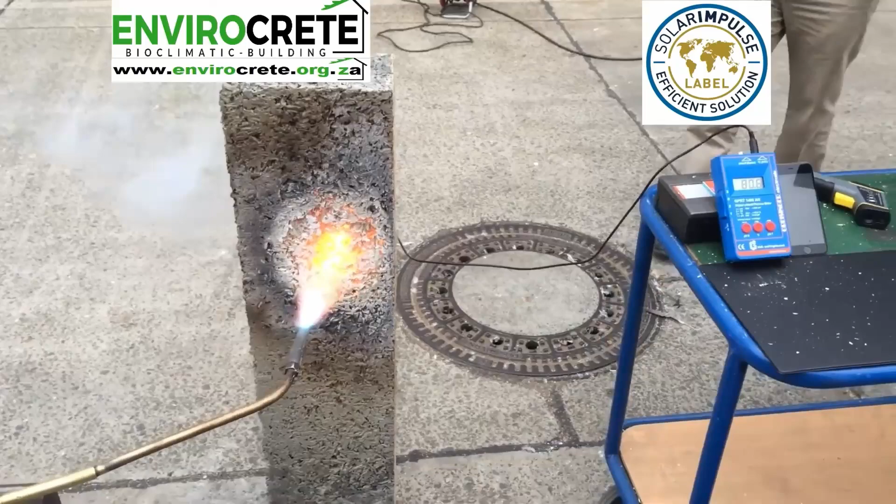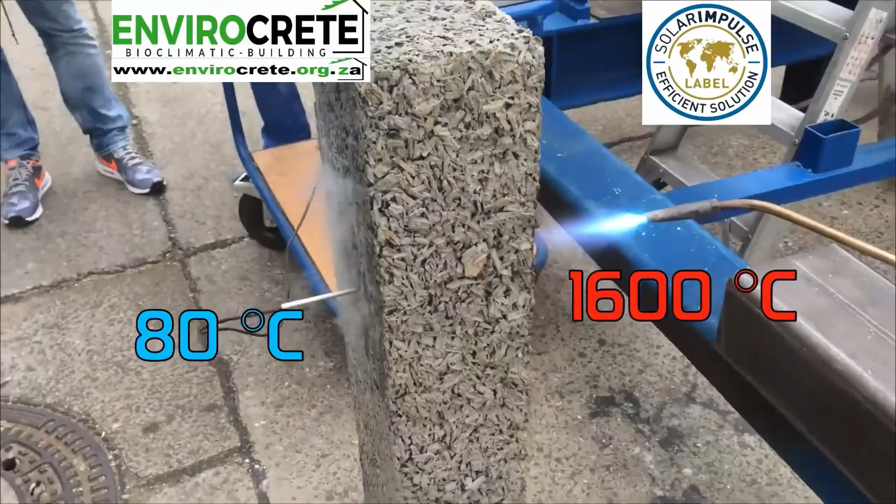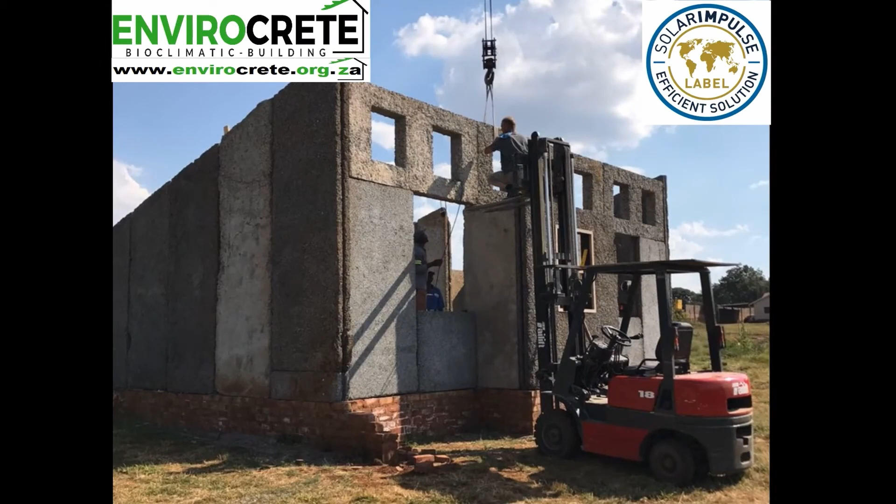So you can see the fire safety is great, and it's all assembled on site. I had the opportunity to actually see this house a couple of years ago already, and yeah, it's worthwhile. Please reach out to them if you want to know more about their product, want to know more about the company, and if you can go and have a view at the pilot house that they have built.

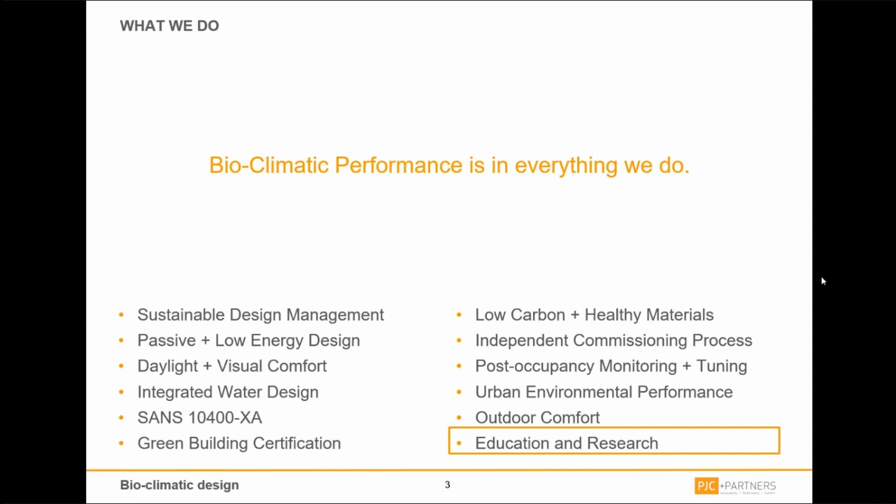And what do we typically do? This is very fitting because bioclimatic performance is essentially in everything we do. Our services cover various aspects, but we try to keep bioclimatic performance as the core around what we do across all our services. In this case it's under our research and education wing, for this presentation.

For today I'm going to try to make it a little bit different. Everyone could just Google bioclimatic design to get what it's about, so I'll try to keep it different. I'm trying to explain the bioclimatic concept itself, deconstruct the word, and go through the bio side of it and our human senses, go through the climate side of it, and we'll take a quick break, pause for a poll question, and then carry on with some practical design questions we've solved, and a little story I made up about Andy and Mindy. And then obviously at the end, some takeouts about the presentation.

So what's bioclimatic? As the word itself suggests, bioclimatic consists of bio, from biology, and climatic, for climate conditions. So essentially it's about the relationship of climate and us as human beings in the built environment. The word itself, bioclimatic, was coined in the early 20th century, and it was not really about buildings at that time. It was more about the study of plants and animals and the climate effects on plants and animals.

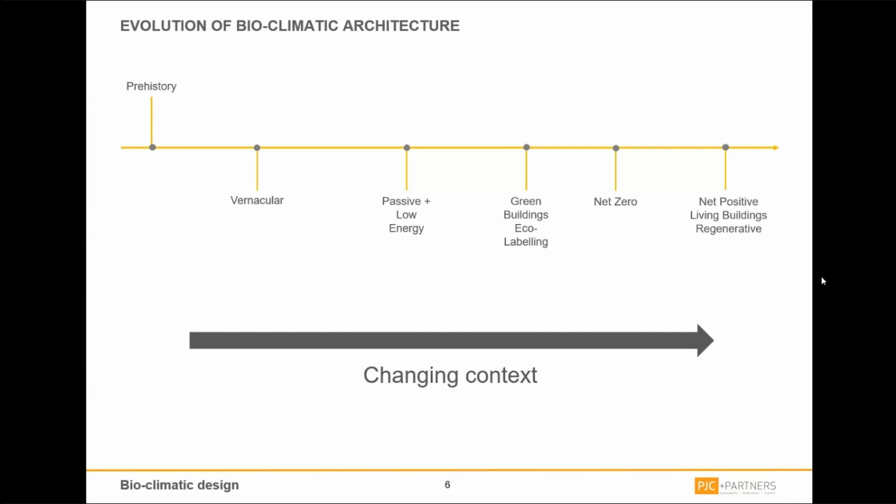So what is the changing context? If we think about prehistory, it was about human beings trying to live somewhere where they could be safe from the elements and safe from animals - it was for security and for comfort. Then architecture as a science and art starts getting introduced, technology was introduced and evolved, and the context changed again when ecology and other natural sciences and social sciences got involved, and it all fed into this bioclimatic concept. Now with social sciences and ecology and natural sciences all part of the concept, it's how we are transitioning to living buildings and regenerative buildings.

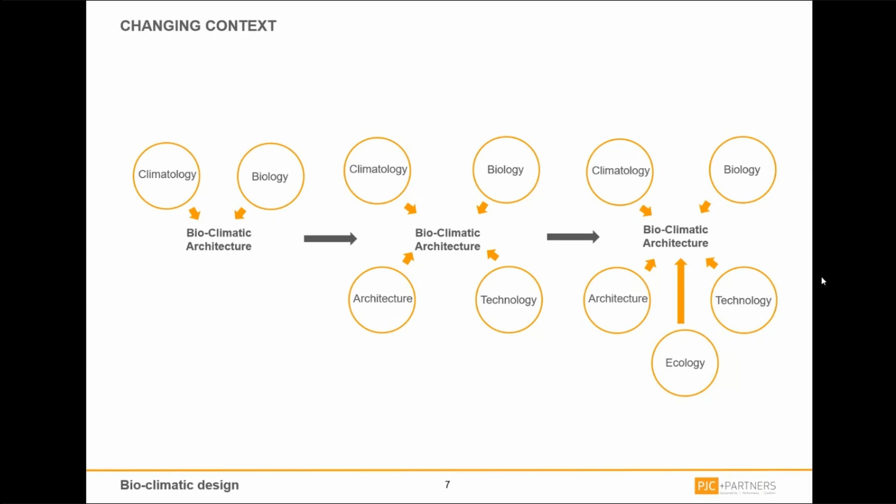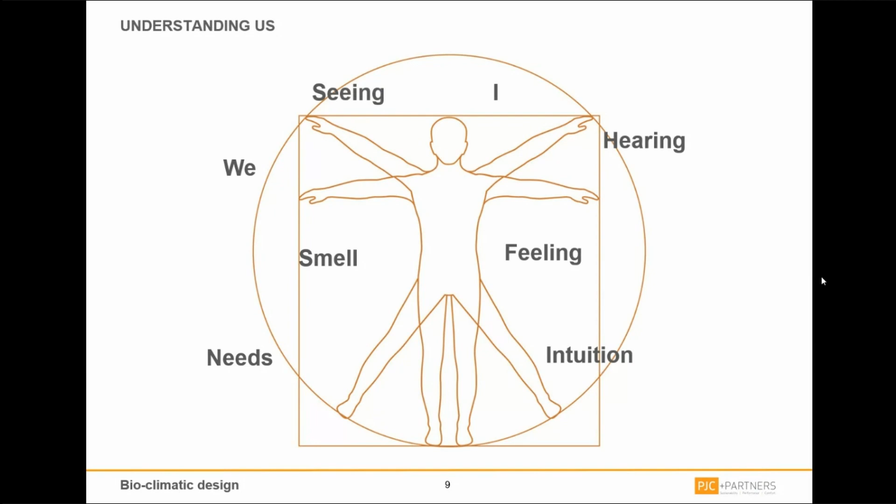So why biology? Why do we care? Why is it even part of this concept? Because in order to design anything where we live and work, we have to understand us and what it means to be a human being in a built environment. Buildings should serve us rather than the other way around - there's no point designing buildings which are super smart or super energy efficient if they don't work for us. Understanding us comes from our senses and a few other things, like the individual as 'I' or the 'we' as a group of people. I'm also going to talk about intuition, and I'll explain a little bit about these different senses and what I mean by intuition.

Every person is an individual and different from all other people on earth in terms of factors like age, sex, skin color, and external differences. But there are also differences in terms of cultural backgrounds, education, attitudes, and behavior. Beyond that, some of us may appear nervous or anxious, and some may appear more mentally and physically well. So it's important to understand this, because it's not one person who uses a building, it's multiple people who use any kind of building.

There's a saying, I'm not sure who it's from, but I really like it. It says the same fire that melts the butter also hardens the egg, which means the same stimuli applied to different people can produce different effects. And this is what a building is.

The individual, as I said, is not only different to other people, but they also develop and change over time. This is important for us, especially in the building context, because we are different persons at different times of the day. We feel differently in winter and summer, and one person can behave differently in different scenarios and situations. So it's important to understand how that interplays with buildings when you design for summer versus winter, for example, or morning versus afternoon.

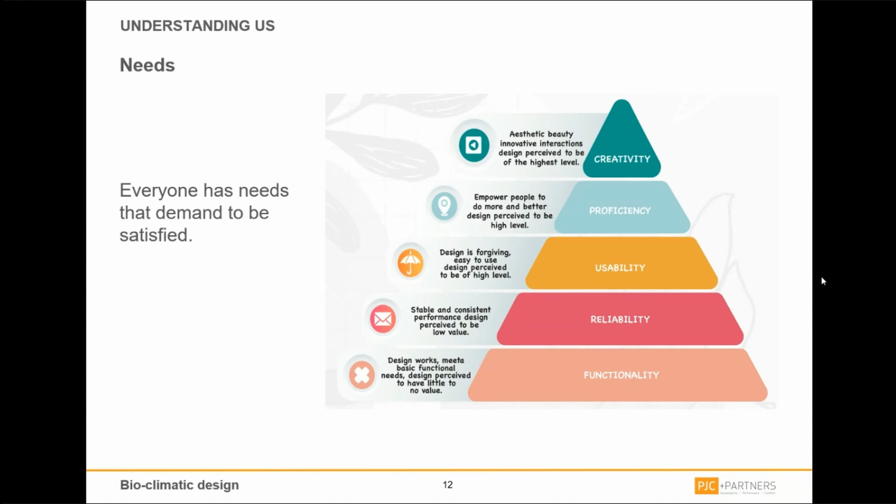Our needs - this is very simple. Buildings need to respond to our needs. As we've seen through the evolution of bioclimatic architecture, we've gone beyond just functionality, beyond just being a safe, secure place where we could be protected from the elements and wild animals. Now we're getting to the human senses itself.

Obviously everything we do around us is a factor of one or multiple of our senses. So seeing, visual comfort - and visual comfort is not just about lighting or daylighting, it's also how we interpret what we see. Not everyone has the same visual acumen. Multiple people can look at the same thing and interpret it in different ways, and the way lighting or color works also gets interpreted differently. Understanding that helps to design buildings with the best or optimum visual comfort for the majority of occupants using the building.

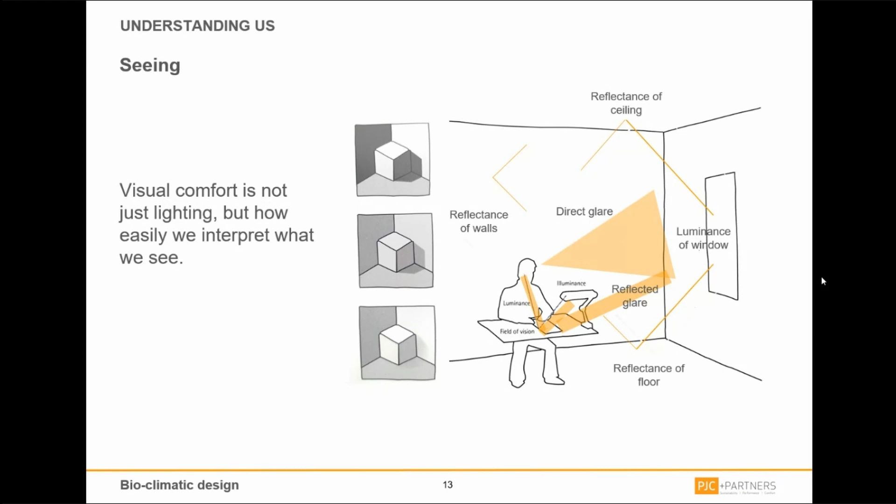A very quick example which everyone will know about is color - I'm sure everyone has seen how color affects our perception. When you paint ceilings, walls, or floors different colors, it gives a different perception of the space.

You can replicate that very easily yourself - you don't have to go find a room to paint. For example, in the office, on the left-hand side, you can use chalk and a piece of paper to easily mimic that perception. You can try it yourself and think about it before going into big simulations or going too far ahead in the design, to get an idea of what it would look like. We've done that in the office with fairly good success.

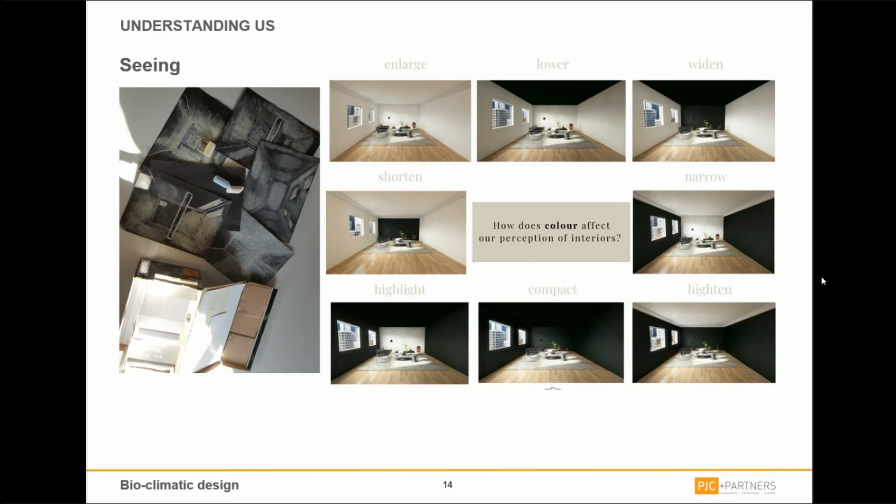On the left, you'll see at the bottom of the image there's also a little bird box with a cutout. Later in the presentation, I'll show you an example of what that means in terms of light and visual comfort. Hearing, which is acoustic comfort.

I'm not going to focus too much on it in this presentation - we're going to talk mostly about visual comfort and thermal comfort. But I wanted to touch on it because it is also one of our human senses. Similarly to how we see, we differ very strongly in our ability to hear. Some people, with a little practice, can distinguish individual tones from a mixture of frequencies, more than others, and this affects our acoustic comfort.

Why is it important? A very simple example would be double glazing or acoustic glass in buildings. This understanding helps to design buildings which are suited for a particular purpose.

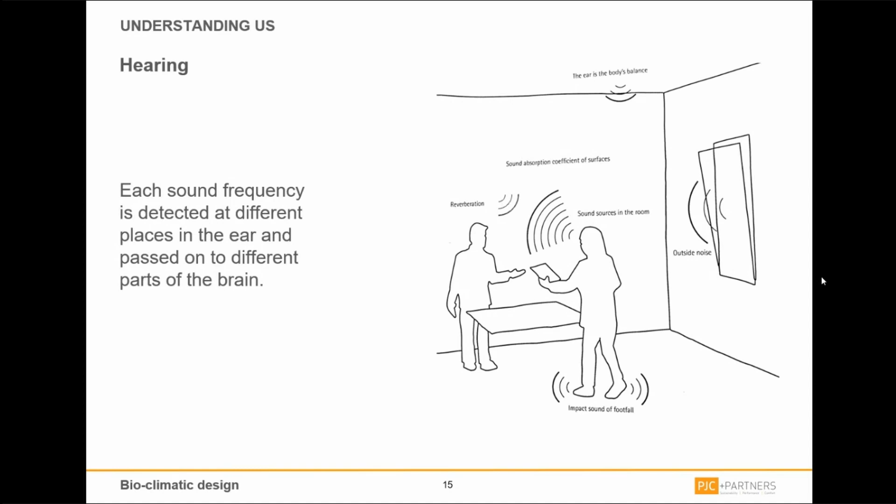Feeling - this is mostly about thermal comfort in this case, and it's mostly about the skin. The skin is the most versatile human sensory organ, with its receptors for cold and heat. We do not have a better measuring instrument - no mechanical or electrical measuring instrument matches our skin. It is so versatile and so accurate. Understanding how heat or cold react with our skin is very important - like, how do we lose heat?

How do we feel when it's too cold? How do we feel when it's too hot? What happens when we change a certain aspect of the environment around us with regards to thermal comfort?

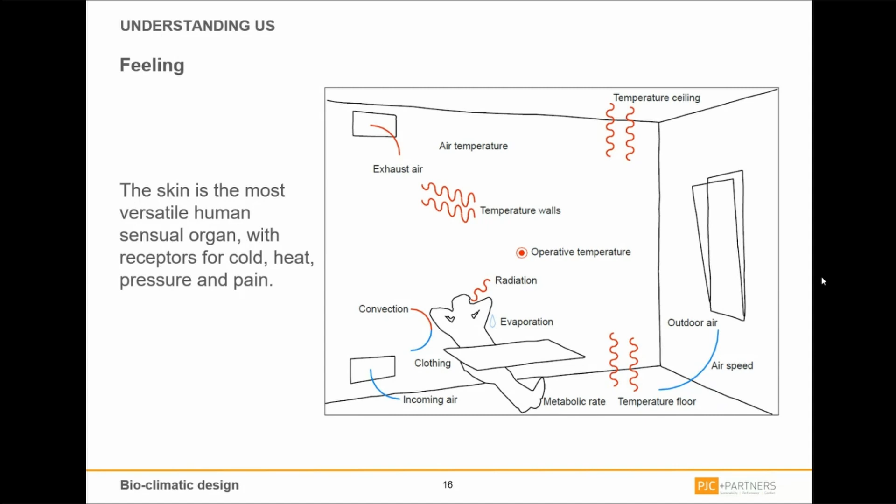And then in cold conditions, you'll notice the ears, fingers and feet start becoming very blue, and that's where it becomes a problem for your extremities, but your body still tries to protect you by keeping your core at a warmer temperature.

This is where when you sit next to a hot glass, you can feel the heat, and when you sit next to a cold glass, you can feel cold. It's because radiation is much more impactful to your thermal comfort.

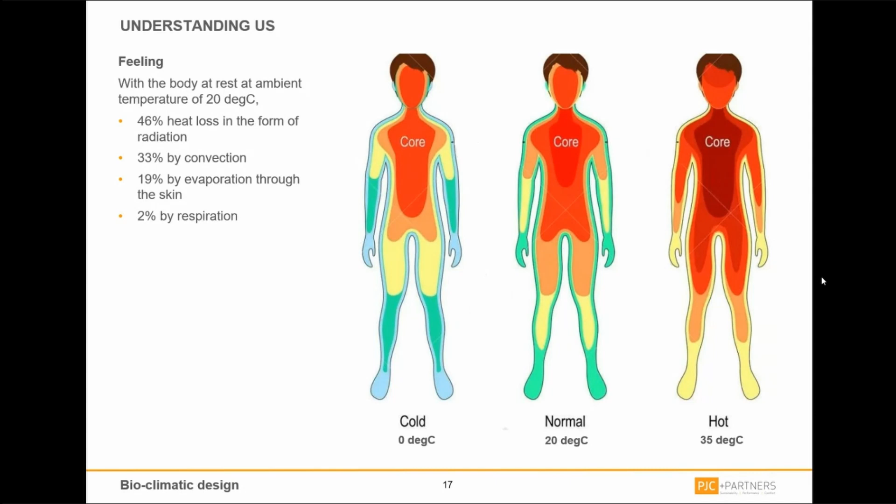Smell - I'm not really going to focus on it in this presentation, but again, as a human sense, it's important to note. And smell in this case goes beyond odors or pleasant smell; it also involves carbon dioxide production.

Fun fact: every liter of carbon dioxide given off requires 1 cubic meter of fresh air to maintain a very healthy environment. So if you're breathing out a liter of carbon dioxide, you'll need to make sure there's 1 cubic meter of fresh air coming into the space for you to be healthy and productive.

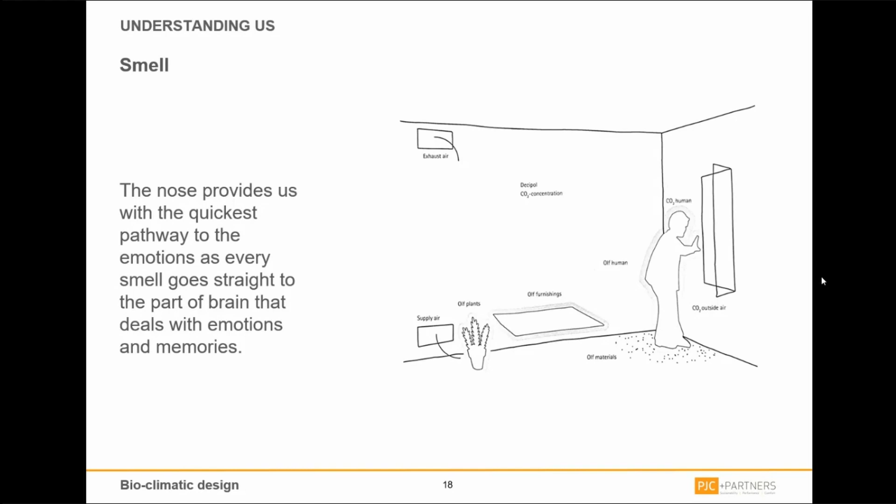And the nose is really an amazing organ. It's the quickest pathway to our emotions, and people would know that if you're walking somewhere and you pick up a smell, it kind of brings back memories and emotions always, and that's important to note when you are in a space.

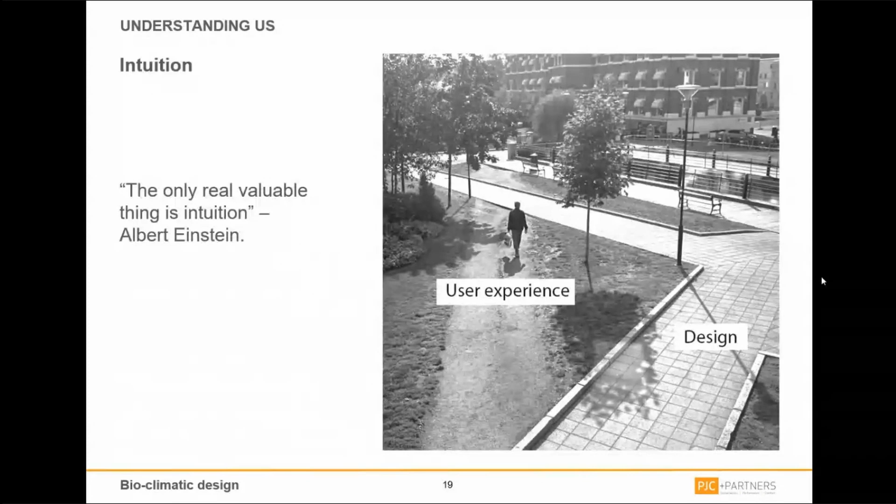But the user experience will be very different to how you've designed it, because you've ignored the intuition of people. And in the building industry as professionals, we try to quantify things as much as possible. It's the same as saying, let's design a building, put AC in, and there's the whole adage of 22 degrees air temperature and people should be comfortable. But thermal comfort is much more than that, and as we've seen, the human body is much more than a physical measuring instrument. It's important to understand intuition so that we approach problems from that perspective as well.

I've tried to touch a little bit on the biology side of it, but because it's bioclimatic, I'd like to touch a little bit on the climate side of it. To understand climate, I like to start by looking at the local context. What you're seeing on screen with the pie charts is actually data, actual climate data from Cape Town.

I took hourly data from a weather file in Cape Town - 8,760 hours - and asked, how many of those hours do we have daylight? South Africa, Cape Town, is usually 50-50. Then, out of those hours, how many are within a certain temperature band and relative humidity band, which we'll consider the comfort band - it's about 31% or so.

And then if we overlap that, you get what I think Chilu from Solid Green calls the natural hours. I really like that term.

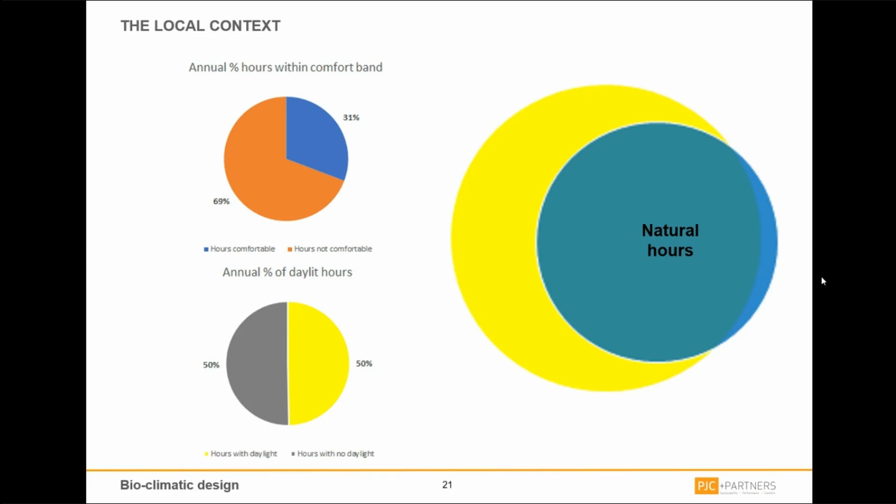Natural hours are very important for us to consider, which means we should not be reducing those natural hours in any building. Otherwise, we're not doing our job properly. The idea is to increase those natural hours without having too much of an energy penalty, if any at all. And the whole thing is around the biology and the climate, so it's about not competing against the natural forces, which is our climate, and our biological rhythms, which is our biology. That's the whole essence of bioclimatic architecture in a way.

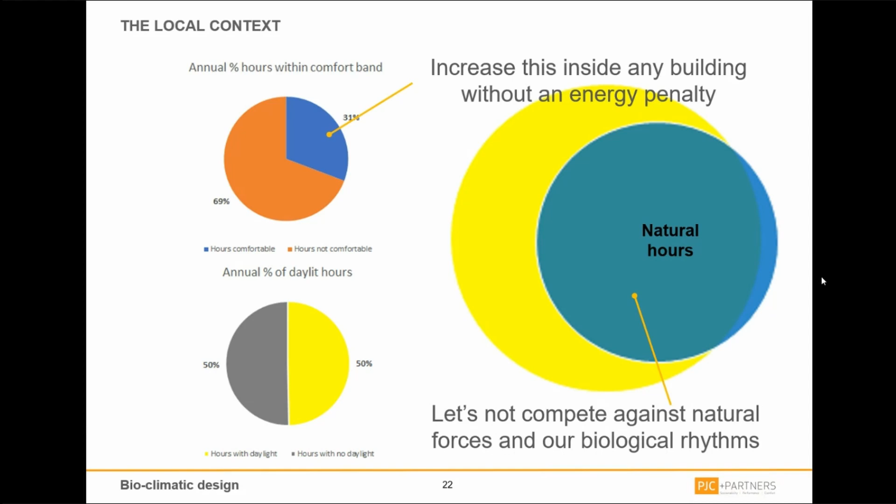So what can climate tell us upfront? Climate in general has a lot of data attached to it. We always look at the climate, but climate is full of data. It's got temperature data, relative humidity data, radiation, wind, all kinds of data. So it can tell us a lot of information upfront.

It can tell us whether in this context we can have natural ventilation, so we should design our buildings more towards that. It can tell us, do we need to have a mix of active and passive systems? It can tell us, can we use the day and night temperature differences to implement certain technologies, or use that even on the thermal mass of the building? So there's a lot of things we can extract from just the climate data itself, without even having a building shape at the beginning.

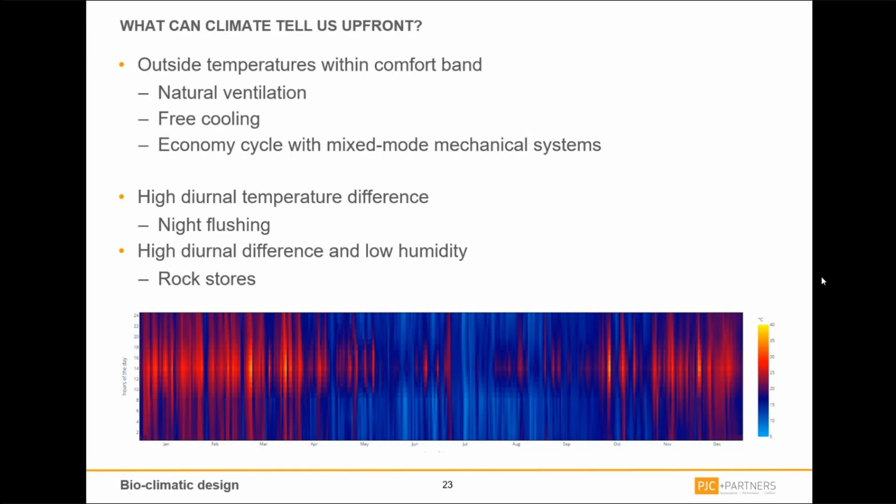We can't talk about the climate without understanding the sun. The sun is one of the biggest factors influencing any climate. Apart from having beautiful photographic pictures, it contains an extreme amount of data we can harness from the sun. It produces energy, it produces light, it produces heat, and it gives life to everything around us.

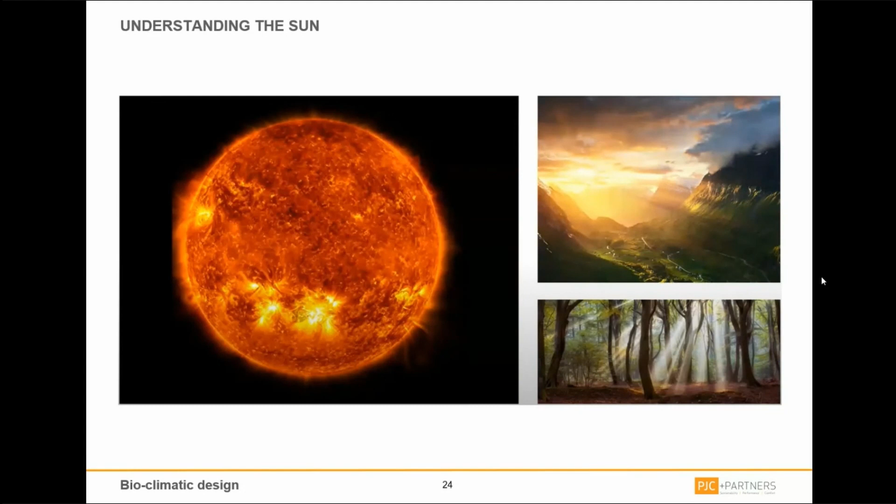So what is it we can extract from the sun? This is a very simple example, again, for Cape Town. The top measures, the roses we call the solar radiation roses, show solar radiation in Cape Town for summer, from November to April, separated into diffuse and direct.

The difference between diffuse and direct is: direct radiation is the sun rays you can feel directly, with one path from the sun directly to the ground. Diffuse is all the reflected kind of radiation from the ground or through the clouds - any rays that are not direct from the sun. What's important to note here is diffuse radiation on all orientations is more or less the same, whereas direct radiation is mostly concentrated on the north, east, and west, but not on the south.

Most architects, any building professional, knows that in the south we don't put any shading in Cape Town. And it's true, but it's also more than that, because yes, shading will affect your direct radiation, but your diffuse radiation is then not - it's not about shading, it's about the glazing. And that's a lesson out of it. From simply studying the sun, we can immediately get lessons for glazing and shading.

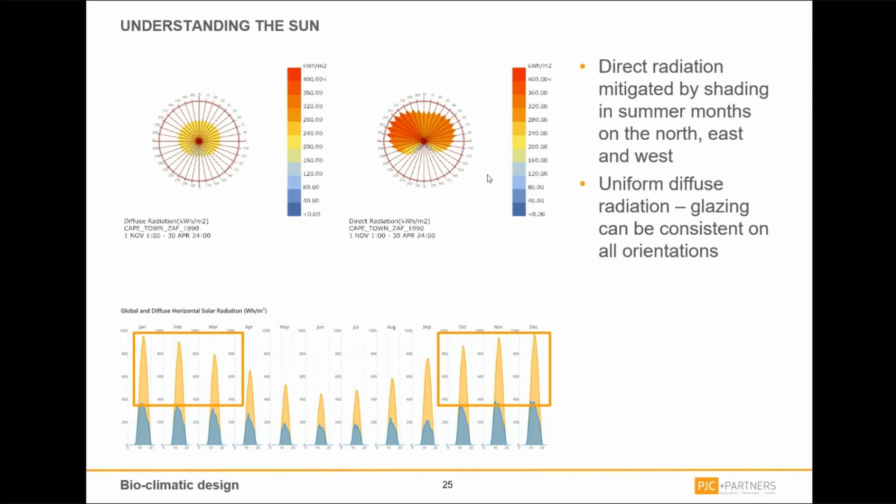When we talk about shading - this is a very simple example of understanding the sun and our latitude, where we are. I'm not going to spend too much time on it, but I just want to show that in Cape Town, on a north facade, you've got your sun at a certain angle in summer and in winter, and based on simple trigonometry and maths, you can easily get an average of how deep your shading should be. That's a very basic example.

But with the same maths, you can get a different type of shading with the same shading effect. That's really understanding the basics, the first principles of the sun and how it looks, with different angles across different latitudes in the world. It helps inform bioclimatic design before we even go and design buildings with a shape.

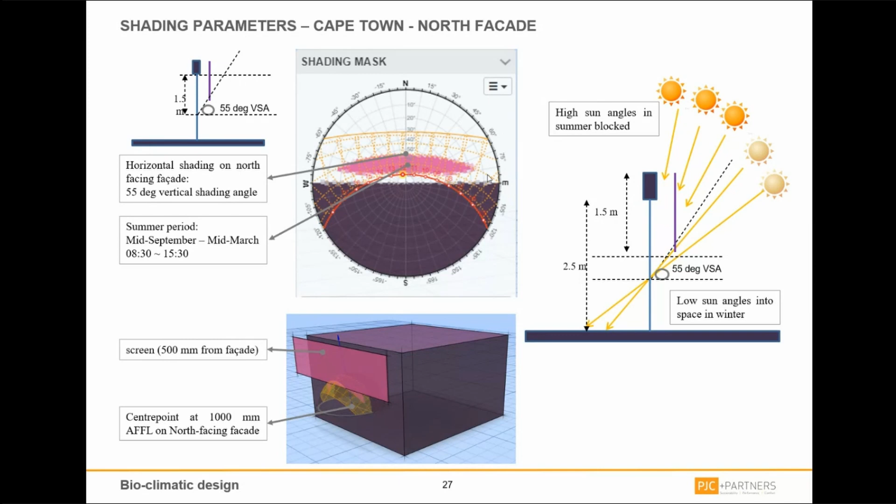More on the sun: apart from shading, the sun provides us light, and daylight is a great proxy, because light is a very curious thing. You can't feel it, you can't smell it, you can't hear it, but you can see what it does. And it's a very good proxy - one doesn't have to have all the nicest, latest software; by looking at what light is doing, you have some sort of idea how to think about your shading and your glazing. It's a very good exercise for everyone thinking about bioclimatic design.

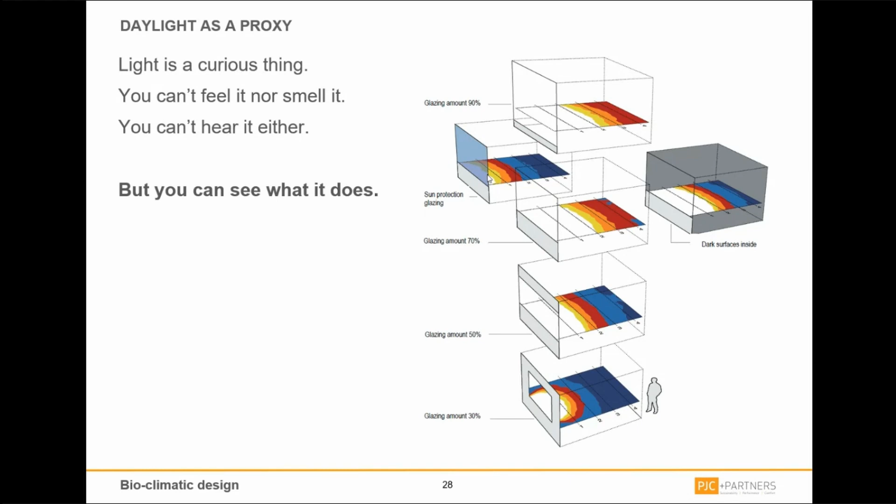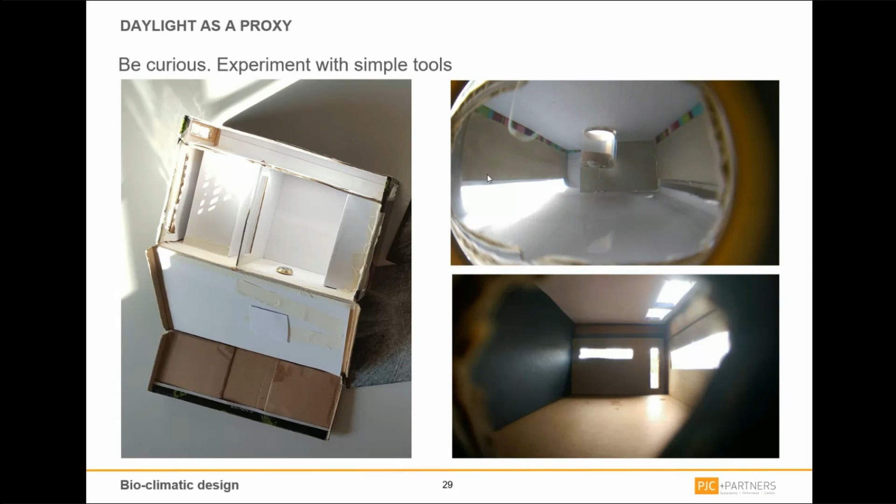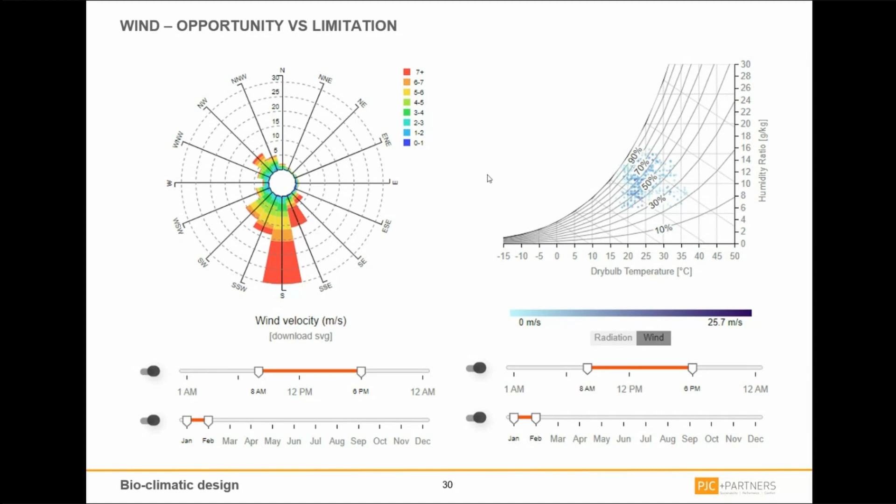The main thing is you understand how to use wind as an opportunity and where wind could be a limitation. For example, in Cape Town in summer, we would love to use natural ventilation all the time, but we know we've got the Cape Doctor, the southeaster, which blows in and will completely destroy your window if you leave it open. That's the idea - have enough information to know when it's an opportunity and when it's a limitation, and also when to turn the limitation into an opportunity. It's a way of thinking about the first principles of it.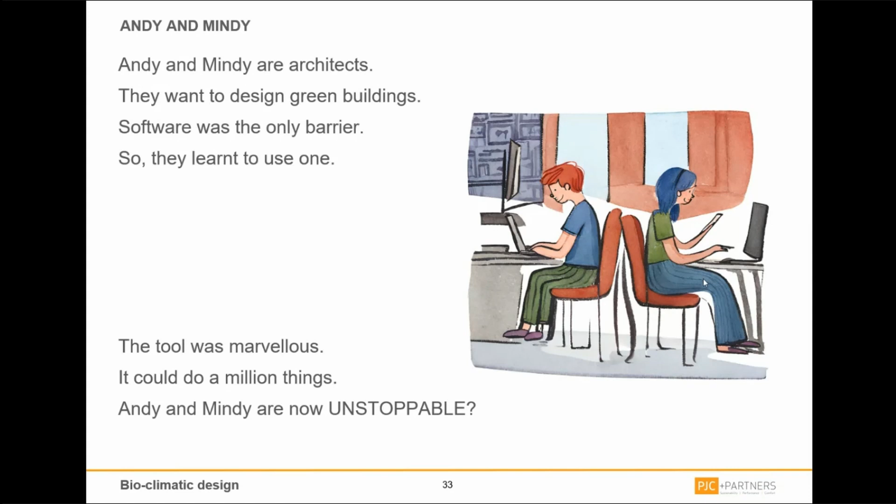But are they unstoppable? If we look at Andy - Andy says to the software, here's my building, run the green options. The software gives them, here's our 50 options. Andy says, wow, which one do I choose? The software says, here's 10 more options to narrow it down. He says, well that's great, I'm still confused. The software is like, here's the single best option. Then they say, are you sure? The software was like, well, you're the one who pressed calculate, you should know. And then the conclusion was, well, it's too technical, too time consuming, so I'm better off without the tool - at least I'm designing based on my expertise.

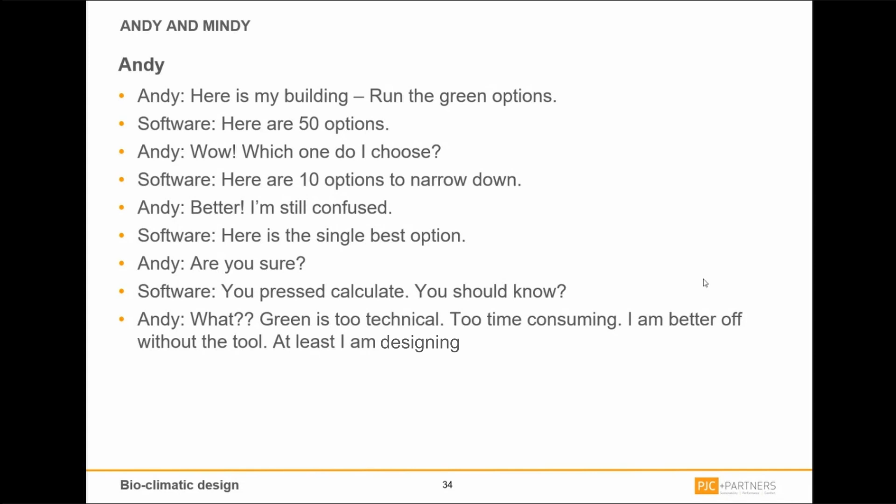But if we look at Mindy - here's my building. But instead of saying run the green options, Mindy says, well, check if roof insulation is effective - so give me the temperature output for the room for one summer week.

And the software gives what Mindy asks. Mindy notices something and says, well, why is the living room cooler than the bedroom? The details are the same. And the software says, oh, there's a modeling error. We didn't put insulation in that room, so we'll run again. Then from those results, Mindy says, well, it's clear insulation is better.

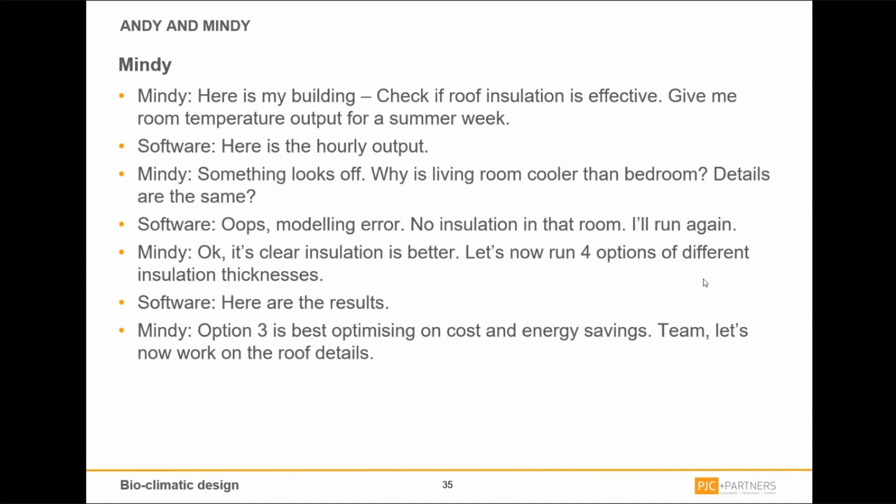So let's just now run 4 options of different thicknesses. Out of that, Mindy finds that option 3 is the best in terms of optimizing costs and energy savings. So she goes back to the team to work on the roof details based on the insulation thickness. And what happened out of that is both of them used the same software and concluded differently.

So the moral is questions matter as much as tools. Software is important, but knowing how to use the software, asking the right question, and knowing how to approach things also matters, sometimes more than just the software and the tools. That's the essence of what I'm trying to get to in bioclimatic architecture: understanding first principles, understanding what it means for the people and the building in that context.

Mindy's advice to Andy would be, well, let's define the question and the metric so that we know what we are evaluating. Let's anticipate the outcome based on first principles, building science principles. And then let's use the software for guidance and answers and to refine our solution.

And that's in a nutshell what we're trying to do. We're trying to understand the first principles of bioclimatic architecture and apply it to solve our problems and design questions, and hopefully along the way get buildings which are energy efficient and work for us.

So I'll give a few examples which we've done in the office. I haven't put too many examples here, just I think 3 or so examples around different contexts. And the first one is a daylighting problem.

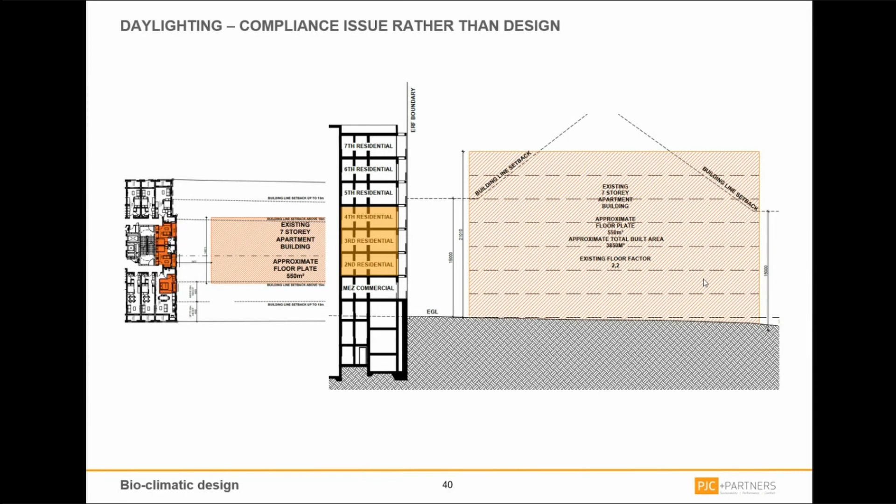In South Africa, we don't actually have a statutory regulation on daylight, but it still got raised as an issue. So we got approached and looked internationally at what metrics we could use, what performance indicators. Typically you've got 3 different types of metrics which you use.

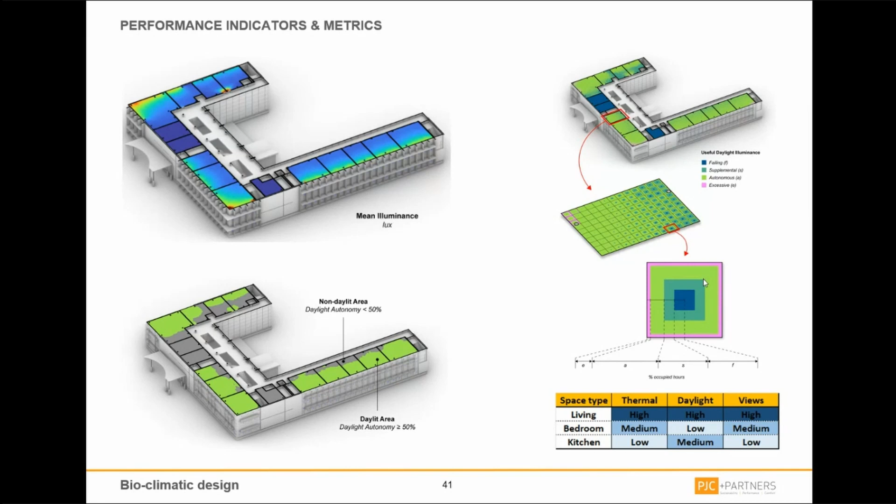But then it's not enough to know the metrics. It's about knowing what the indicators are, what the hierarchy of comfort is with regards to the different spaces, what benchmarks to use. And it's important to know that.

In this case, the mean lux of the design is about 495. With our recommendation it became 928. And it's using a little bit of what we understand about light and how light behaves to provide those recommendations.

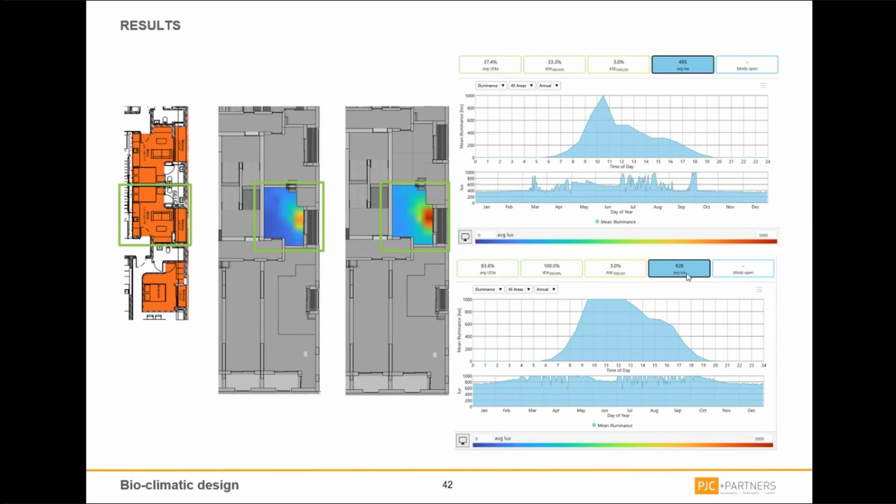And the same thing around other different metrics. So this is spatial daylight autonomy. And this metric—just in case a lot of people don't know—daylight is not just about how much lux levels or how much light we've got. It's also about distribution. Distribution of light is also very important so that we don't have glare, we don't have contrast, and there's enough light across the floor plate so that we are safe.

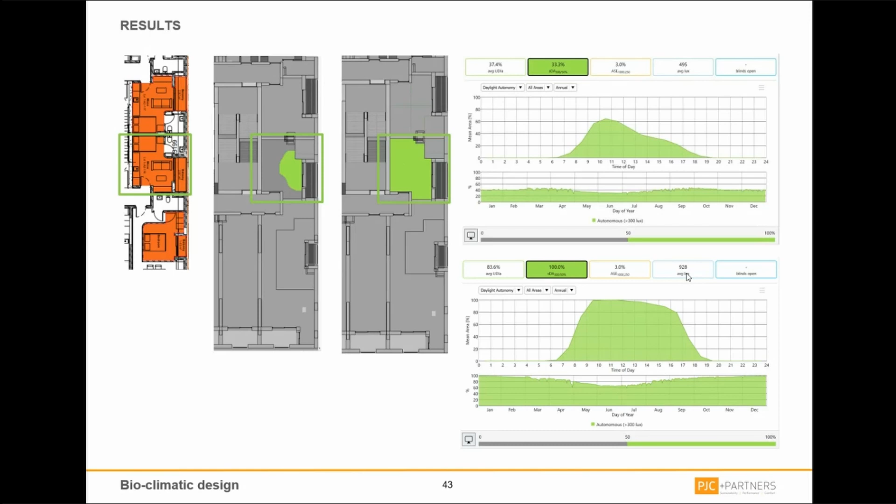There's no dark spots, and obviously the context is important. Some contexts like museums and specialized contexts, you do want darker areas in some spots, and understanding how light behaves helps us design for all these kinds of spaces. That's just a different metric.

But at the end, essentially, the idea is to show one where you're not meeting compliance in a certain way, but through recommendations you can meet compliance. And that's a very simple example of using daylight, but understanding how daylight works, understanding the different metrics of daylight and how to apply it, how people see it and interpret it.

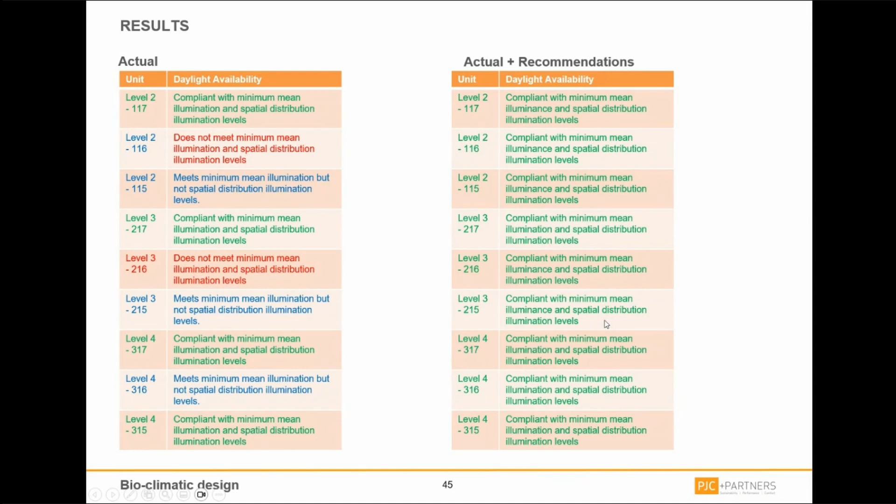It's very important because our metrics wasn't just about lux levels, it was also about spatial distribution. The other one is glazing.

This is a very typical question we address in a lot of projects: what glazing should we use on our buildings? Enough people have done it enough to know from gut feel, in this climate use this or that. But in this case, there was more than just interpretation of glazing. Acoustic was also a primary factor, along with different orientations, what we use for it, and cost. Cost was a big factor too. Understanding how this relates to cost matters, because it's not about getting the best glazing everywhere around the building—it's about knowing where we need it and where we don't.

It's important to understand, if you look at the top left side of the slide, this image about how light from the sun goes through glass. The sun shoots out short wave and long wave radiation towards a building, but glass converts every short wave radiation—short wave radiation being visible light and UV—into long wave, which is infrared, which is heat, and traps it inside. Once the light goes through, it gets converted to long wave, and it cannot go back out through the window. This is essentially the greenhouse effect, and this is why when you have glass-enclosed spaces, it gains heat when exposed to sunlight.

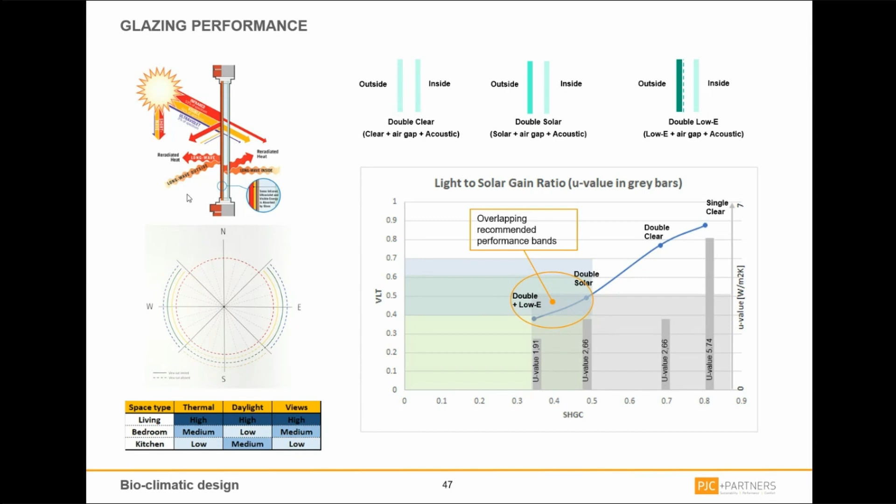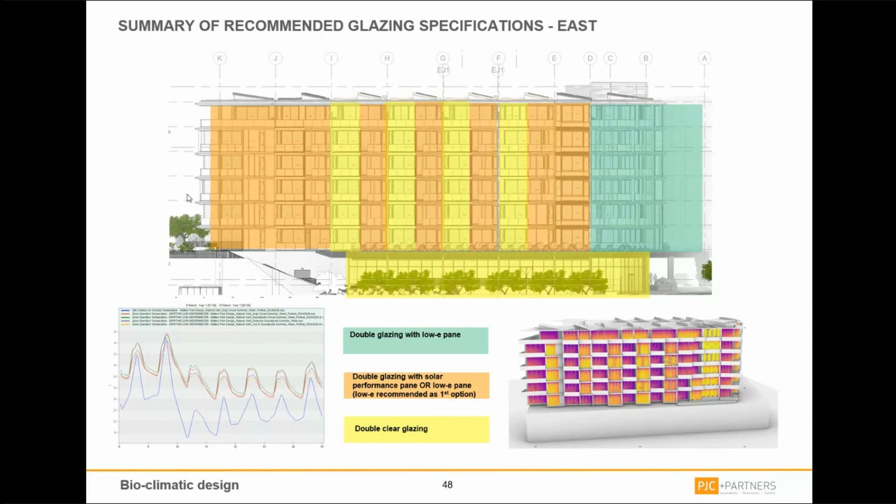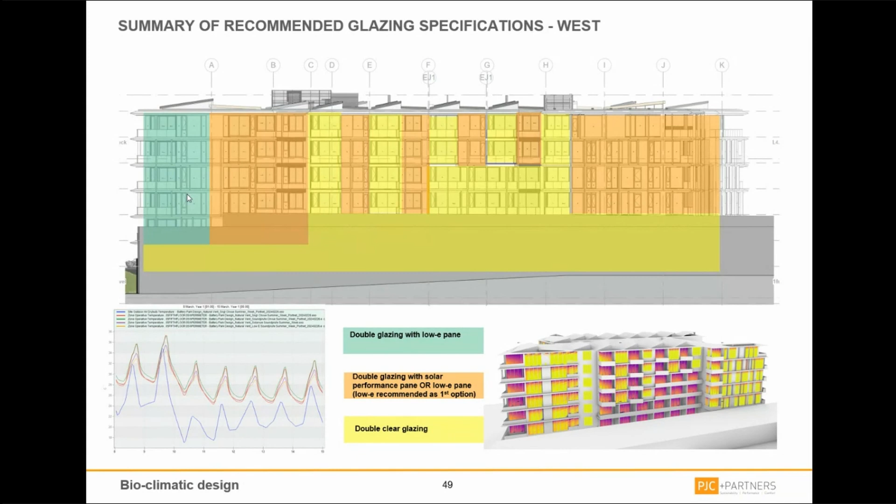The difference of knowing all of this is very important when you do various kinds of simulations about temperatures and radiation. It helps you identify that you don't have to have one solution everywhere. As long as you can balance your costs, your aesthetic, and your acoustic requirements, you're able to play with the building and think about it differently—say, if I do a certain shading response here, I can put a different type of glazing, and might not need it in other places. It all fits within the budget while keeping the same architectural philosophy, understanding the first principles of sunlight and radiation.

This one was a glare question. The building was already built, and the tenants had moved in—a single tenant kind of building. They have a reception desk, as we've seen in most commercial buildings, in the atrium, and they had a glare problem there. It was unworkable—everyone sitting at the reception area had glare in their eyes and on their screens. The easiest option would be to put automated blinds all along the atrium facade, and it had to be automated because of the span and extent of it—you can't do it manually.

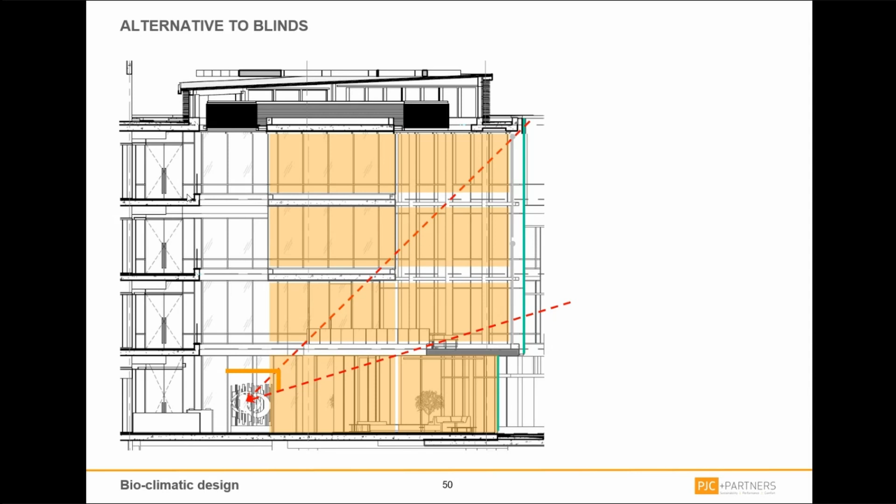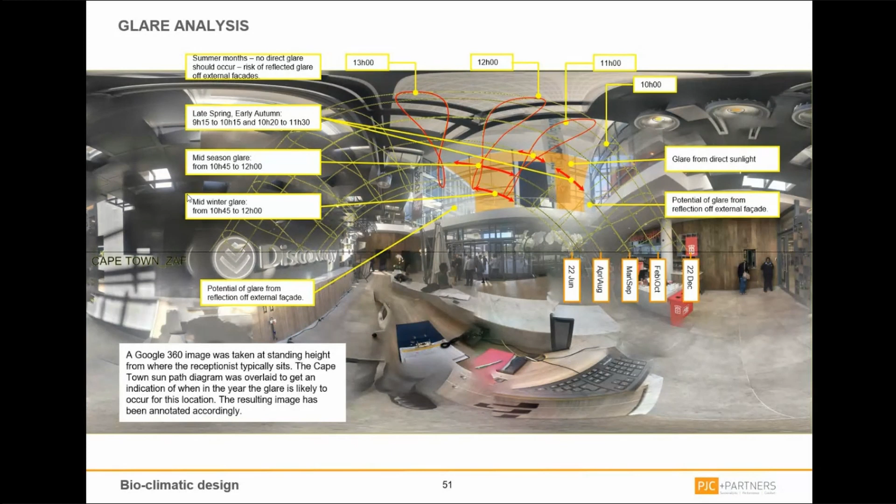That inherently carries a lot of cost to do after the building is already built. So what we did is go there and use some basic tools and first principles ideas about where the sun path is, to find out when the glare happens, at what time, and what alternate solutions could be approached. What we proposed was to build an architectural interior design feature around the reception desk, which blocks the sunlight when it's a problem, combined with having blinds only where needed, where the feature around the desk doesn't do the work required.

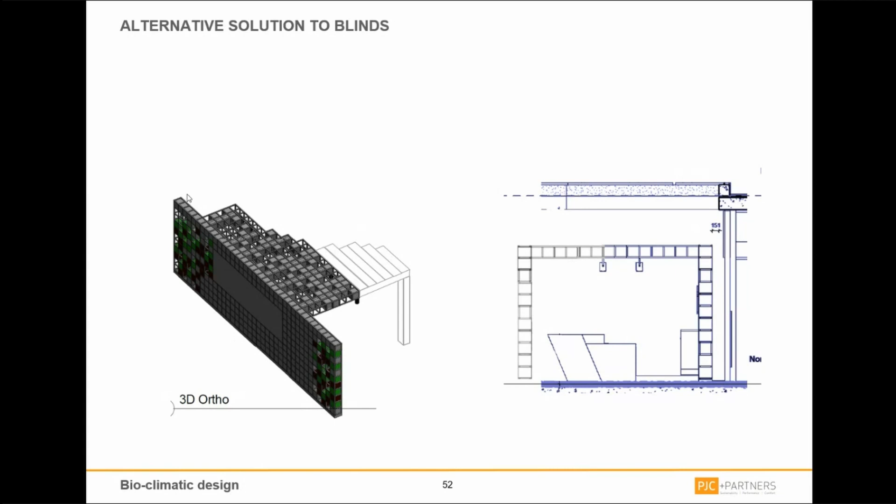And it became a very nice hybrid solution where you're saving costs primarily by not having blinds, those long extended blinds everywhere, and having only what you need, with a little bit of an interior design feature around the reception desk. This is quite a particularly practical problem we've addressed, but I wanted to show this as an example.

We were approached for a competition by a German firm, and they wanted us to be part of their team for a competition in the north of Germany, where we looked at the climate. In winter, it's -5 to 10 degrees, relative humidity around 80 to 90%, very low direct solar radiation. In summer, up to 30 degrees with relative humidity up to 85%, hot and humid with very high direct solar radiation—very extreme summer and winter climates.

When we were chatting with the team—the structural engineers, the mechanical engineers, and the architects—we started brainstorming some ideas, and we had this idea of a box-in-a-box kind of approach. How can you think about it differently?

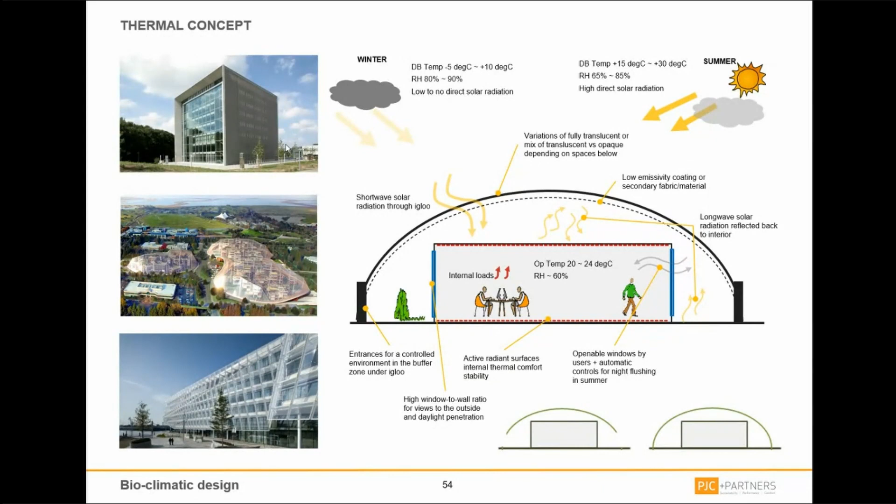I just wanted to give a bit of a takeaway for what I was trying to get across in this presentation. One is knowing your first principles about everything—about your climate, about design, whatever you're trying to do in terms of biology or climate.

Trust the intuition of the local context, investigate it by talking to the people. We can think about design in a very quantitative way, but it's always good to know the local context. Ask the right questions, find out what the right questions are, rather than just going to a software and saying, let me just simulate the hell out of it.

Model only when necessary for guidance and to validate assumptions and answers. This is something very important that a professor from a German university told us: do not model if you don't need to. If you can do a calculation on the back of an envelope or any kind of matchbox calculation, do that first. Software is important, but knowing how it works or when to use it is equally important. A good analogy: you won't use a chisel to cut a tree, but you won't use an axe to make a wooden sculpture.

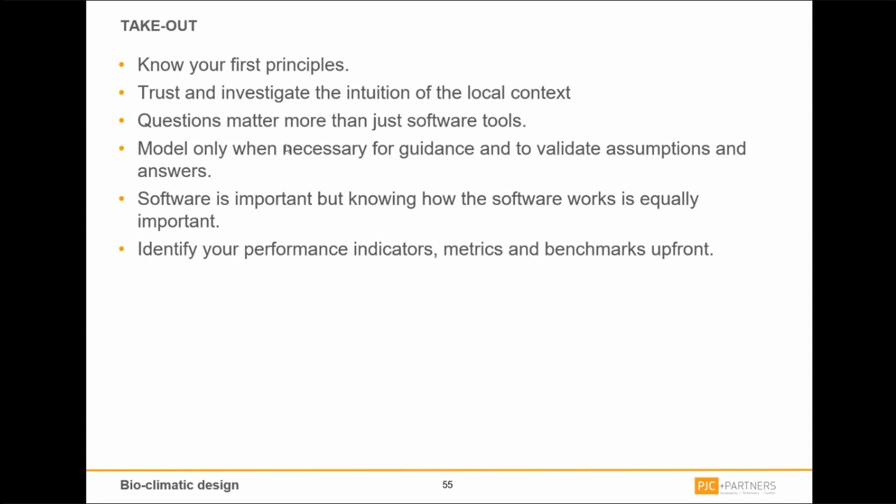And lastly, identify your metrics, your benchmarks upfront. What are you going to use to know that you've done the right thing? What are your metrics, what are your performance indicators? Because when we get lost in software simulations, running options, we forget what our benchmarks are, what metrics we're comparing ourselves against.

And that's it. Great, thanks Yogesh. That was awesome. Any questions from the floor?

I'd like to make a broader comment. When it comes to bioclimatic design, beautiful, we're always considering one building, how we design the building, and where the building is with respect to the elements: the sun, the light, the temperature, the wind, and so on. But never, or very seldomly, do I hear talk about the surrounding buildings, or what if we put a tree in front of a house, a big tall tree? That's part of bioclimatic building and design, according to me.

So we simply omit the human surroundings. We just consider the natural surroundings and then we design our building. The humans live also outside the building. And if we design the building in such a way that something gets in the way, another building or whatever, and this hasn't been taken into account, we'll have some problems anyway. So why is it that this topic never comes into the picture? That's just a broader question, and I would like to see it happen.

That's a very good point, I really enjoyed that question. Not to justify what you're saying, because I do feel it's important, but I had a discussion with one of the building control officers a couple of weeks ago, and we were talking about external shading. They were asking, how do trees come into the legislation, for example? Can you use it as a shading device? And it doesn't come into the legislation. But from a modeling point of view, I do feel it's really important, especially if you're trying to create that environment around your buildings and making use of the existing vegetation.